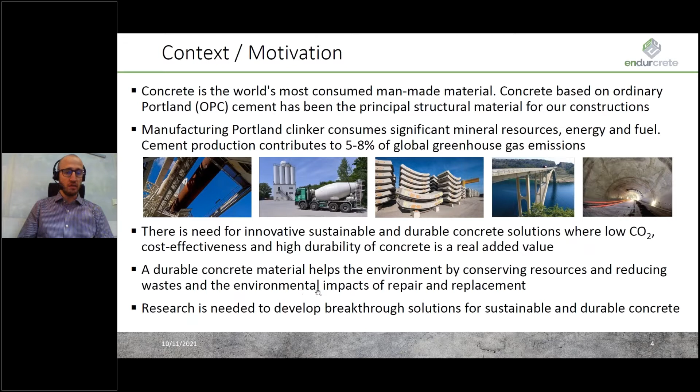So this was the whole idea of the project when we started it. We want to be more sustainable, but also more durable. The reason for the improved durability on top is that, of course, if you're more durable, you will actually postpone the repair or the replacement, which will also decrease the environmental impact of our industry.

We've got funding of 6 million euros from the European Commission for the full task and consortium. Here you can see the EnDurCrete logo with our goal, which is to develop a cost-effective, sustainable concrete with added value application and improved durability.

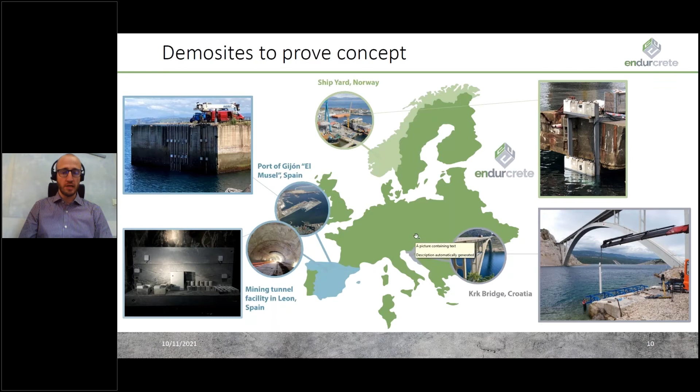And then we have a bridge site in Croatia where we place here - you can see the placement of one concrete panel into this area. The idea is, of course, to validate all what we have developed in the lab into these sites. So you will again hear more from the dedicated partner later on during this webinar.

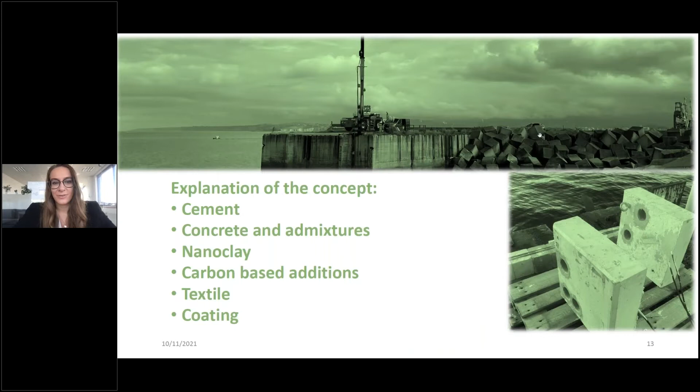Yeah, thank you very much. I would like to present the composite cement activity at Heidelberg Cement. As mentioned before by Arnaud, we have to look at opportunities to reduce the clinker content in Portland cement because clinker production is associated with high CO2 emissions. The new standard EN 197 Part 5 of the European Cement Standard gives us a lot more possibilities compared to EN 197 Part 1 to lower the clinker factor or clinker content in cements.

What is the problem when we lower the clinker content? It's the strength development in the cement. As you can see here on the left side, the 2-day strength of an OPC compared to a mixture where we replaced 30% of the OPC clinker by quartz, which is a non-reactive constituent - because of the dilution of the clinker, we have much lower strength development.

If we take reactive materials described in the cement standard, for example granulated blast furnace slag in a mixture with 10% limestone, we have a very tiny effect on early strength development by these constituents, but on the right side you see the graph for 28 days, and after 28 days we have a significant improvement in strength because of the reactivity of the slag in combination with the clinker and the limestone. But even there is a gap which we have to close.

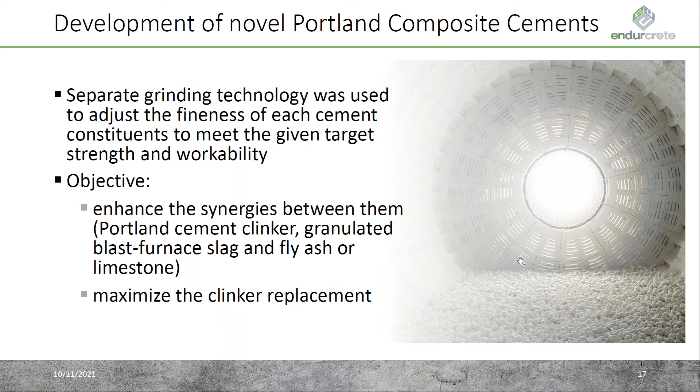And the way to close this gap, what we observed, is the technology of separate grinding of the materials. For the last 100 years, most of the constituents in the cement were co-ground. Now, where we are looking for lower clinker factors, we have to go in the direction of separate grinding, which means we have to grind every material with respect to its grindability and reactivity to the best fineness, to replace at the end most of the clinker.

If you work in such complex systems with 3 different materials in grindability and reactivity, it will take a long time to find the right places where to place your recipe exactly. And there we designed a computer model where we end up at the end with the result that we can replace, if we find the right fineness of the material.

We can replace 50% of the clinker by a mixture of 40% slag and 10% limestone without significant impact on cement performance. At the end, I would like to show you the result when it comes to recipe and to the strength development in our project work here. These are the CEM II/C-M cement and the CEM VI cement, which we delivered to the partners in this project for the activities for all the test and durability aspects tests and for the demo sites, where we will get the presentation now from my colleagues. That's from my side for the moment.

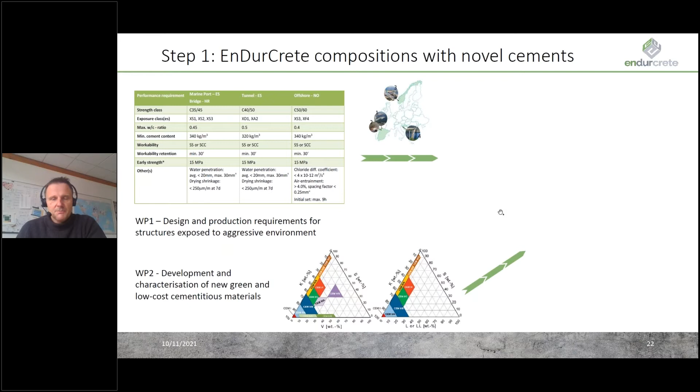The whole development went into 3 basically simple steps. In step number 1, what we tried to do is develop EnDurCrete mixes with novel cements only, which were developed again in work package 2. Our development of concrete recipes was based on design and production requirements, which we got from work package 1. The end result was basically 3 different concrete types containing novel cements.

A marine concrete mix, which was intended to be tested at 2 demo marine sites, one in Spain and the other in Croatia. We have one tunnel mix intended to be tested at the tunnel demo site in Spain. And we have developed one offshore concrete mix to be tested for offshore application at the demo site in Norway.

Then in the second step, we tried to incorporate these novel additions and additives into existing concrete compositions. But before we did that, we tried to figure out what's the impact of these additions on fresh and hardened properties of the concrete. The focus was on workability and strength development, and we tried to incorporate a nanoclay corrosion inhibitor and two types of carbon-based materials, basically char and recycled carbon fibres.

The study on the compatibility of these additives with the concrete was done by Sika, and what they figured out is that these additions have a negative impact on the workability, and this problem was solved by Sika. They provided tailor-made polymers and admixtures to basically solve these concrete performance issues.

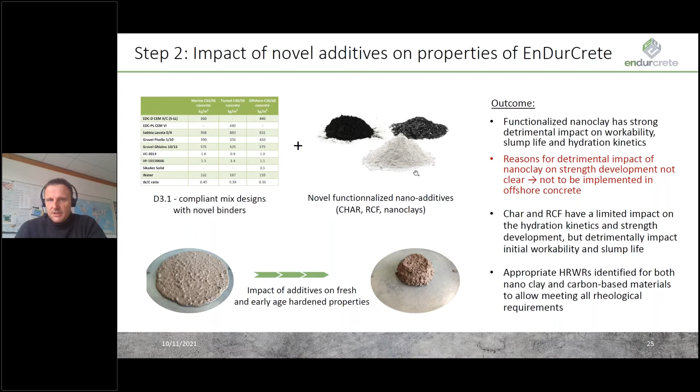When it comes to strength development, we saw that the carbon-based materials have more or less no impact, but this nanoclay corrosion inhibitor has a negative impact on strength development. For this reason, we decided to only test this nanoclay at one demo site. I'll get back to this on one of my next slides.

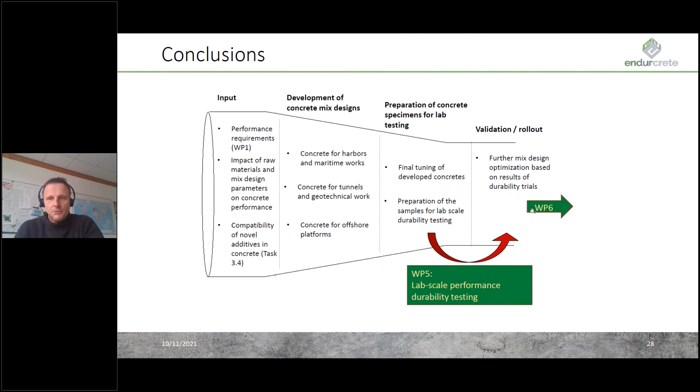This is basically my last slide, just to tell you that in the scope of this work package, we haven't only developed concrete mix designs, but we also helped lab preparation for the lab testing in the scope of work package 5 and rollout of developed solutions, which occurred in work package 6. So this is all I have. Thank you very much for your attention.

Good morning everyone. Today I'm going to explain what we have done so far with the company EnDurCrete and the nano-inhibiting additives for corrosion.

iBox Create is a consulting micro SME located in Valencia, Spain, and we are focused on developing maritime port technologies through two research and development areas: the first one is about advanced materials, and the second one is wave energy. All this activity has granted iBox recognition from the Spanish Ministry of Innovation with the Innovation Seal since 2015.

Our product is a corrosion inhibiting additive, and the knowledge on these nano inhibitors is based on the development of a former company called CS Infraestructuras, which disappeared. Before disappearing, we signed an agreement with them in 2014, where iBox would be in charge of all the technological development and exploitation of the corrosion inhibiting additive. Our inhibitor prevents the occurrence of corrosion processes in structures exposed to marine environments or in areas where de-icing salts are used, and we achieved the Spanish patent, published in May 2019. This is the full background.

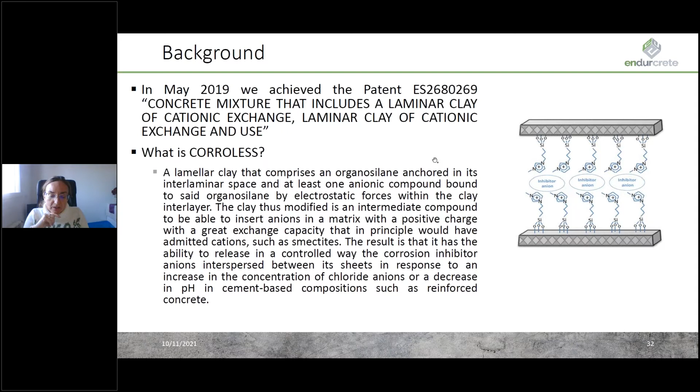Now let's go to the project. Within EnDurCrete, the objective was to develop a product that will act as an intelligent reserve of corrosion inhibitors in reinforced concrete, which can be released only when there is a danger of starting oxidation processes of the reinforcement. The fundamentals of these inhibitors, which we call CORROLESS, is that they are laminar clays modified with silane groups and anionic corrosion inhibitors for the prevention of corrosion in reinforced concrete. These developed additives respond actively to the presence of chloride anions, which cause corrosion in concrete, releasing the inhibitor anion in the presence of high concentrations of these chloride anions through an exchange mechanism.

iBox participated in task 1. During this task, we reviewed the requirements of some regulations specifically for marine environments. Our main task was work package 3, which we were leading, specifically task 3.1 named Development and Optimization of Smart Corrosion Inhibitors based on nanomodified clays. The aim of the task was to develop and optimize the novel additive to be implemented in concrete mix designs, developed specifically to comply with the requirements defined in work package 1.

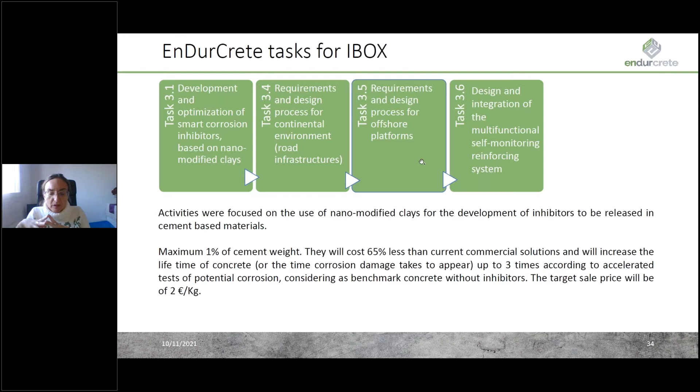For a competitive product, we had to achieve that the inhibitor be a maximum of 1% of cement weight. The price would be less than current commercial solutions, around €2 per kilogram, and the performance would increase the lifetime of the concrete, or the time corrosion damage takes to appear, up to 3 times.

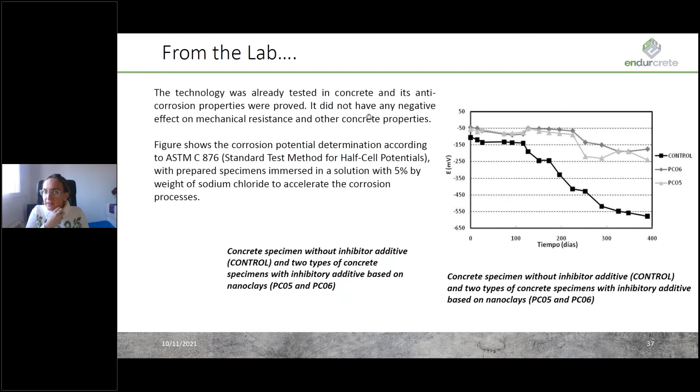During work package 3, the technology was tested in concrete, and it was proved to have anti-corrosion properties without any negative effect on mechanical resistance and other concrete properties at first. Afterwards, it was decided there were some constraints, so it was only going to be tested in marine environment, not offshore. But in our results, as you can see, as time passes, the results are better — it's a specific product which performs better over time.

To sum up, for work package 6, it will be later explained by our colleagues from Acciona. But then in this upscaling...

The inhibitors were ready, and it was time to start with the pilot scale. The first challenge that arose during the upscaling was that the energy consumption during the production process was high, and we have to optimize that.

The results that we are having so far are the same as on work package 3, and Acciona will explain later.

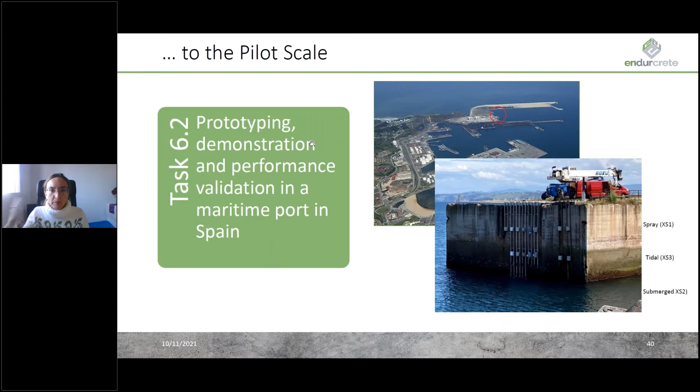So that's also far. We need more time to see the performance of the corrosion inhibitors, but at this moment we have to wait.

The price of the production process was not €2, but it's still in the range of commercial products, so we have to wait for the results. Thanks so much, that's all.

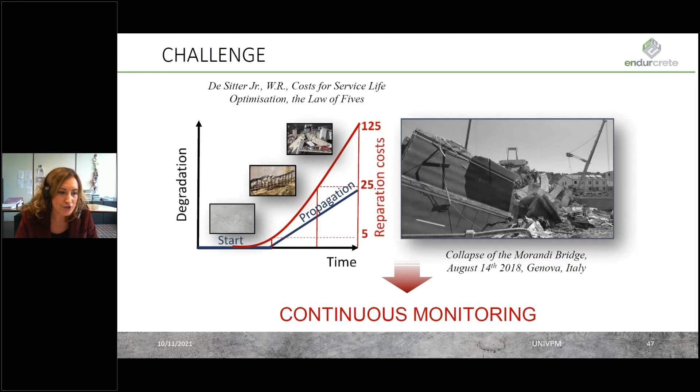Self-sensing is the ability of a material to perceive its own condition simply by measuring its electrical resistivity, such as water penetration, aggressive substance penetration, and strain. So in this context, self-sensing is the ability of a material to perceive its own condition—cracking, water and aggressive substance penetration, and strain—by simply measuring its electrical resistivity.

Compared to other traditional monitoring systems based on a multi-sensor approach, self-sensing concrete is able to detect multiple phenomena in a cheaper and less complex way.

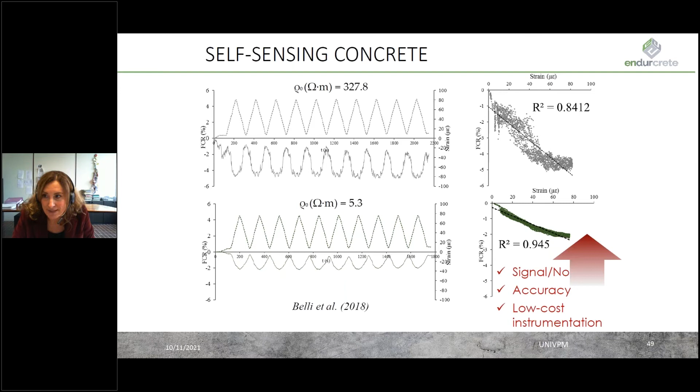The self-sensing concrete properties can be enhanced by decreasing its electrical resistivity with the addition of conductive admixtures. In fact, in this way, by giving a higher signal-to-noise ratio, low-cost instrumentation can be used, with the possibility of creating real measurement networks with nodes distributed on the whole structure.

Carbon-based additions are excellent for self-sensing concrete. However, those actually available on the market, such as carbon black, carbon nanotubes, graphene, and carbon nanofibers, are not sustainable, very expensive, and sometimes very toxic.

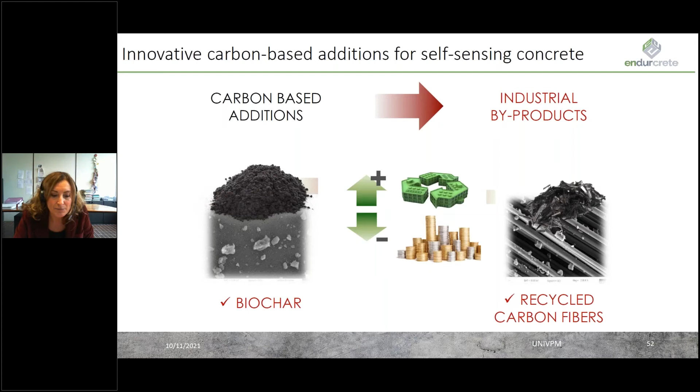Therefore, in the EnDurCrete project, these commercial carbon-based additions for self-sensing concrete have been replaced by innovative, low-cost carbon-based byproducts, such as biochar from thermal treatment of biomasses, and recycled carbon fibers from cutting and milling carbon fiber panels and fabrics.

The experimental results have shown that the joint use of these low-cost fillers and fibers, even if it does not affect significantly the mechanical performances of concretes, does decrease its electrical resistivity, giving the possibility of exploiting the self-sensing performances of concretes in terms of carbonation, chloride penetration, and water absorption.

Therefore, in the EnDurCrete project, a low-cost monitoring system which uses self-sensing concrete blocks manufactured with these low-cost carbon-based byproducts have been manufactured and tested in two different demo sites, Port El Musel in Gijón.

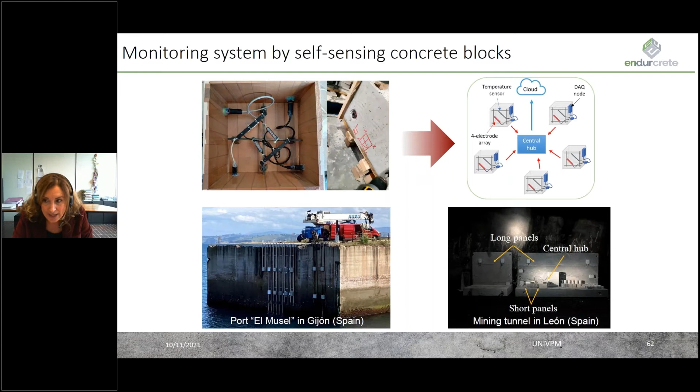A distributed sensor network has been realized, with measurement nodes installed in the elements to be monitored and then connected to a central hub. Data are available on a cloud through a Wi-Fi network or LTE modem.

A mobile application has also been developed, which, after selecting the demo site, the concrete panel, the parameter, and the time interval, shows data as a graph that can be saved in a CSV file to be sent via email.

Results related to the data acquired over approximately 10 months confirm that the signals measured in the panels with conductive additions have a higher signal-to-noise ratio with respect to those measured in panels without additions, confirming the results obtained at lab scale.

The low-cost monitoring system did not show any faults during the demo test activities, and finally, data were not affected by any issues due to the aggressive exposure. Thanks for your attention.

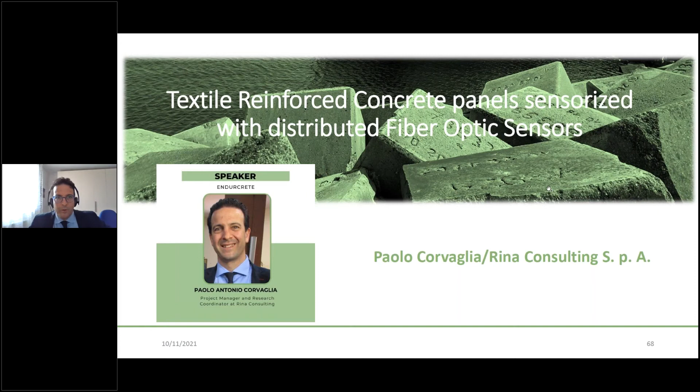Thank you very much, Susanna, for your kind introduction, and good morning to everybody. Textile reinforced concrete is an innovative cement-based composite material exploiting the non-corrosive nature of fiber materials for realizing slender and durable concrete elements.

In the EnDurCrete project, we further innovated this concept by embedding a fiber optic sensor inside these panels, thereby providing them with a built-in structural monitoring capability.

The final goal is to realize a modular sensorized solution like this, so that when you are on the field for installation, you just have to connect the two adjacent panels by means of an external optical patch cord.

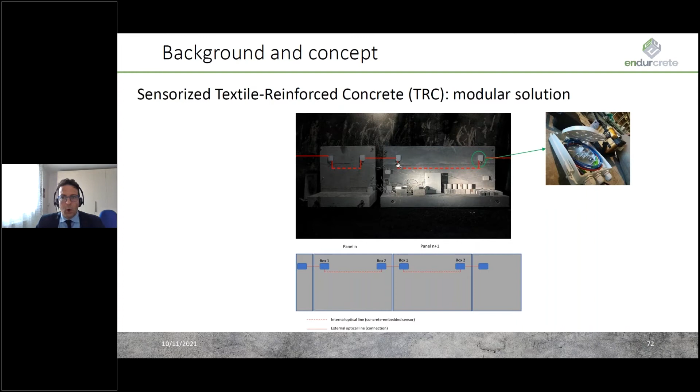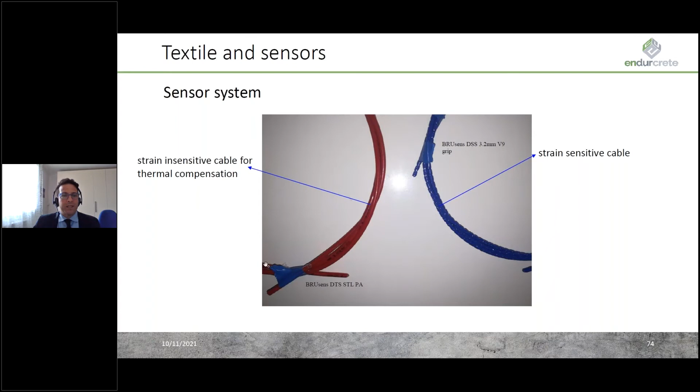Let's have a look at the components of the system. The textile is made of alkali-resistant glass with a mesh opening of 3 centimeters, while the sensor system is made of 2 distinct cables. Here they are. The blue one is a strain-sensitive cable with roughened surface for better adhesion with concrete, while the red one is a strain-insensitive cable for thermal compensation.

In order to set up the production technology and characterize the performances, we designed and produced 2 samples. Sample A is the reference one, made of ordinary reinforced concrete, while sample B is similar to sample A, but with the replacement of the steel net with the textile.

Here are some steps of the production of the samples: textile preparation, then sensor fastening to the net, sensor protection by means of plastic ducts in order to withstand the concrete pressure, the preparation of the mold, then concrete casting, and finally the demolding.

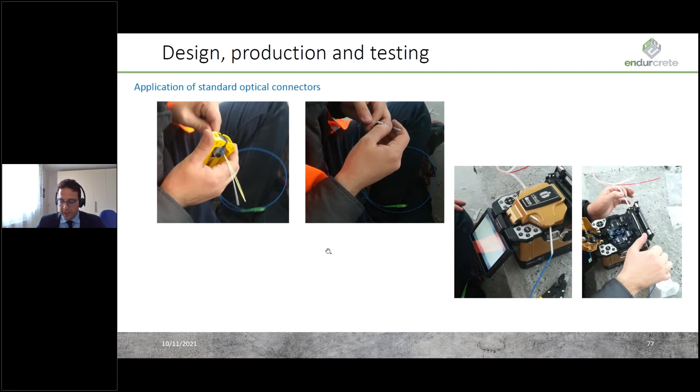These pictures are related to the application of standard optical connectors at the end of the fibers.

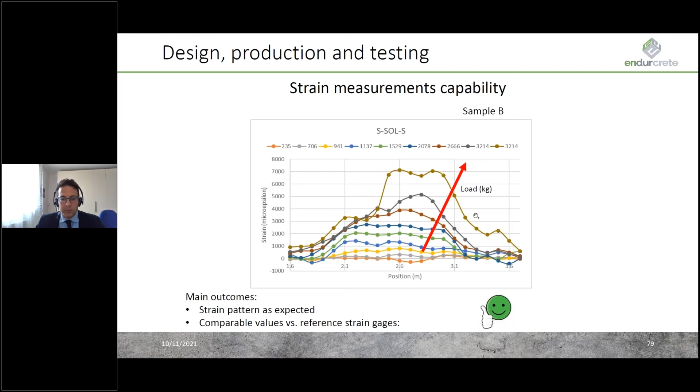The panels were then tested in a 3-point bending test. Here you can see some details of the setup, and here the main results, namely the strain profile along the panel at increasing load. We can comment that the strain pattern shape is as we expected, and also that the strain values we measured are comparable with those obtained by reference electrical strain gauges.

So let's draw some conclusions. We developed and tested textile reinforced concrete panels sensorized with distributed fiber optic sensors, with the final goal of developing a modular concept of self-sensing components. We found that the sensors survived the production process and provided consistent data up to an advanced cracking stage. Also, the TRC solution provided enhanced ductility and load carrying capacity. And finally, we demonstrated this technology with large-scale prototypes in a real tunnel environment.

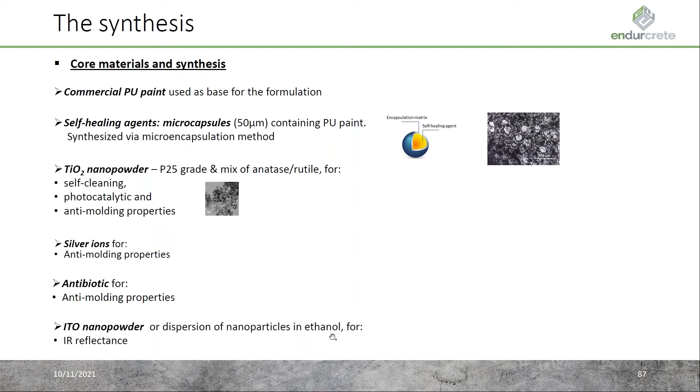The multifunctional formulation includes a commercial polyurethane paint as the base, self-healing agents consisting of 50-micron microcapsules containing polyurethane paint synthesized by AMS via microencapsulation, titanium dioxide nanopowders of Degussa P25 grade as well as a mix of anatase and rutile titanium dioxide for self-cleaning, photocatalytic, and anti-molding properties, silver ions and a small quantity of antibiotic for anti-molding properties, and finally indium tin oxide nanopowder, which serves as a stabilizer of the formulation against the impact of solar radiation on the system.

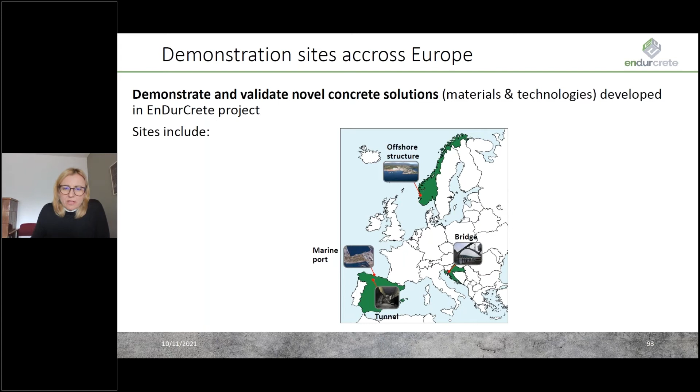We already saw in the first presentation by Arnold that we had 4 demonstration sites across Europe, representing demanding and quite different, environmentally challenging locations and different types of structures. We went from the Mediterranean climate to the ocean climate to the Nordic climate, with structures exposed to the marine environment, as well as a tunnel structure exposed to carbonation and chemical attack.

The purpose of the demonstration projects, as mentioned before, is to test the EnDurCrete technologies, which included different types of cements, different types of additions or admixtures used in concrete production such as corrosion inhibitors, carbon-based green microfillers, textile reinforcement, and multifunctional protective coatings.

At the sites we used different sizes and types of specimens, trying to simulate larger structural elements, while also including a large number of small specimens used for monitoring and determining mechanical and durability properties over time.

At all sites there are different monitoring techniques involved, either through embedded sensors or embedded fiber optics or other monitoring methods, as well as environmental sensors for local climate monitoring, and then non-destructive and destructive testing of the smaller specimens.

The first site I will present is the offshore platform in Norway, which was led by Kværner, now Aker Solutions, and the contributing partners were ZAG, Acciona, RINA, AM Solutions, and Nuova Tesi System.

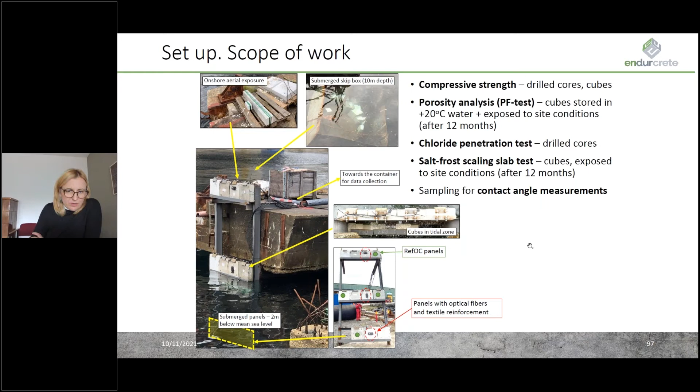You can here see some of the results - the detailed results are presented in one of our last deliverables. The panels were used for drilling cores, and as you can see on the core here, chloride penetration tests were performed on both sides, and the middle core was used for concrete compressive strength determination.

Generally, we can see that the reference concrete had higher values than the EnDurCrete offshore concrete, probably due to unfair competition with the 52.5 cement. Nevertheless, the EnDurCrete offshore concrete performed quite well regarding frost and permeability measurements, and the coatings performed really well.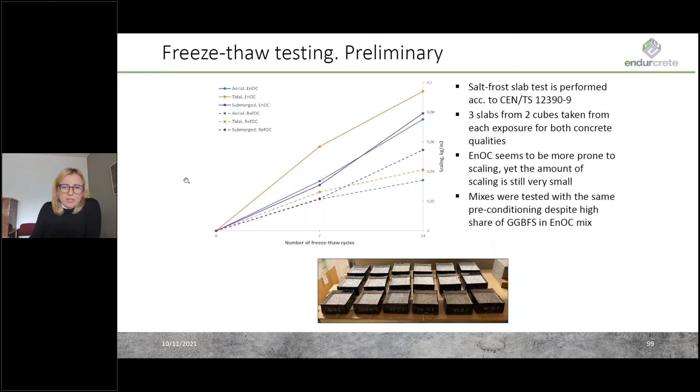The freezing-thawing testing results are presented in this graph. As you can see, the reference offshore concrete performed a little bit better, but overall all concrete samples performed very well regarding the frost degradation problem.

Generally, the EnDurCrete offshore concrete had lower permeability than the reference concrete, and the total air content was varying between 5 and 6%, which is a very good prerequisite to be frost resistant.

Chloride penetration tests showed no apparent difference in chloride penetration between the offshore reference and offshore EnDurCrete concrete after 12 months. The highest chloride content was measured in the splash zone and the submerged zone. The treated panels also show minor presence of chlorides up to 5 mm depth.

The measurements using electrical resistivity sensors, performed by ZAG, did not show any significant corrosion activities. Contact angle measurements of the waterproofing membrane, performed by Acciona, showed low wettability of the surface, implying that its hydrophobic properties are as expected.

The second demonstration site is a marine port in Spain, which was led by Acciona, and contributing partners are Novatesi Systems, AM Solutions, iBox, Vito, Heidelberg Cement, and Sika.

The location of the demonstration site is in North Spain, exposed to ocean climate. The prototypes of the samples were installed in a concrete dock called Port Gijón, El Musel, Spain, supported by the Port Authority and coordinated by Acciona.

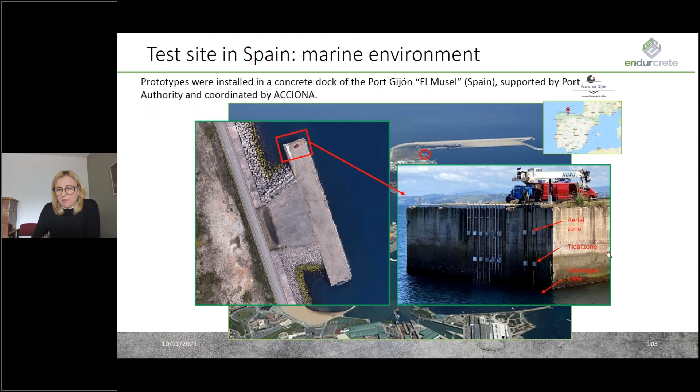We can see on this slide how the steel frame was used for holding the panels in different zones, from aerial zone, tidal zone to the submerged zone.

In this site, two cement types were used. First, the reference cement was CEM3A 42.5N, and the EnDurCrete cement CEM2CMSLL. Additionally, technologies developed in EnDurCrete were used: polyurethane coating, corrosion inhibitors, and biochar with recycled carbon fibers.

You can see all the tests which were performed on those samples exposed to those environments, which included durability tests, carbonation, chloride and sulfates determination, compressive strength, and monitoring with electrical resistivity sensors.

On this slide, we can see different samples from different zones, which are quite significantly different. In the splash zone we have a clean concrete surface. In the tidal zone we have some algae formation, and in the submerged zone we have some biological growth. Overall, the samples performed very well.

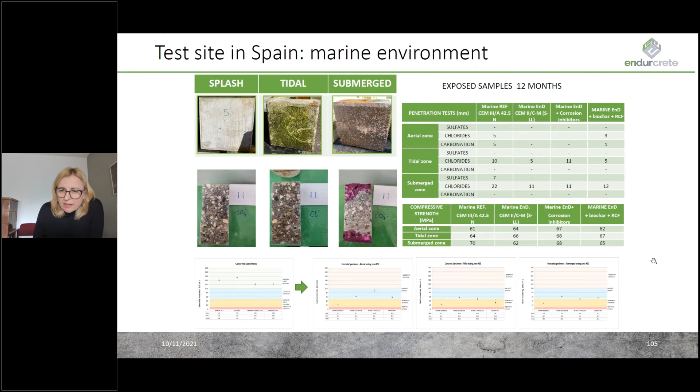As we can see in the compressive strength results, the EnDurCrete cement or concrete samples achieved the same or even higher compressive strength compared to the reference one. Also in penetration of chlorides and sulfates, the EnDurCrete concrete samples performed better than the reference concrete. The detailed results of the electrical resistivity were presented before by Margarita and Francesca, so I will not go into details.

Additionally, we can see the results of porosity, density, and mean pore size. Most important is that both concretes performed really well. Also, water penetration was much lower compared to the reference concrete. In the SEM scans, we can see no significant difference in the microstructure, and the overall impression is that EnDurCrete concrete had very low permeability.

In summary, sulfate penetration was not recorded in splash and tidal zones, and in the submerged zone, the best results were with EnDurCrete concrete with CEM2 CM SLL. The same was true for chloride penetration, with better results recorded with the EnDurCrete concrete in all zones, as well as for carbonation. The bulk resistivity showed a moderate risk of corrosion for the reference cement and low risk of corrosion for the EnDurCrete concrete. In the SEM scans, there were no significant differences.

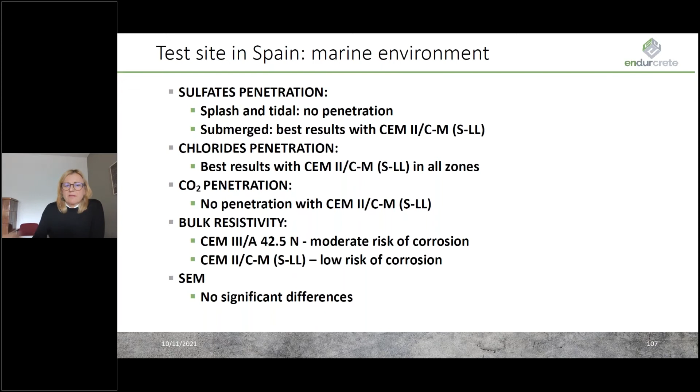The next demo site is also in Spain, again led by Acciona and supported by Novatesi Systems, AM Solutions, iBox, Vito, Heidelberg Cement, and Sika partners. The tunnel is a publicly owned entity that used to be a coal mine, but is now out of service and used as a research center for investigation of different excavation techniques, spraying, shotcrete, etc. We used it for placing our tunnel elements, as Paolo has already presented, representing the exposure classes XD1 for moderate humidity and XA2 for moderate aggressive chemical environment.

In the tunnel, two tunnel elements were placed - large size panels - and there are 60 small specimens for different test purposes, also including different technologies. As presented before, inhibitors, carbon, and coatings were used here.

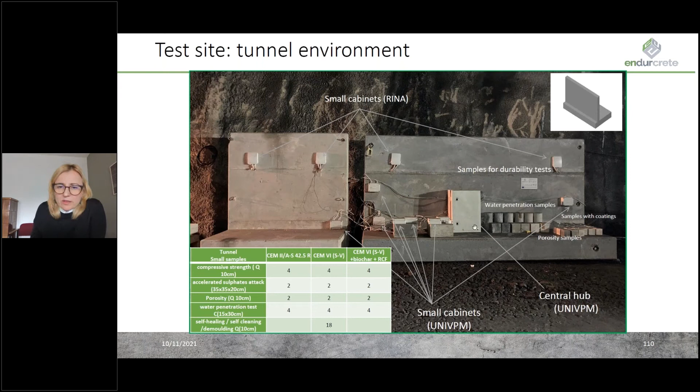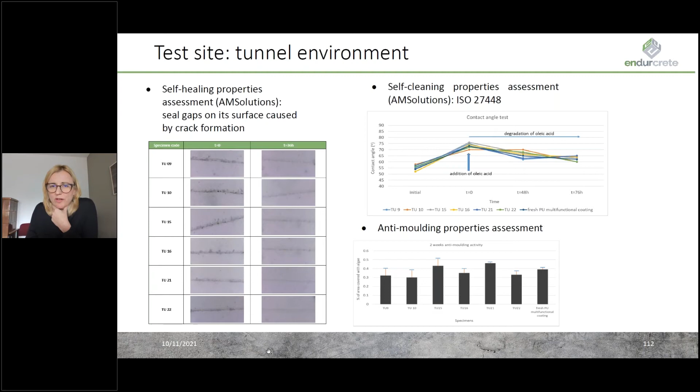In this slide, we can see the testing of the coating, which was presented by Maria, so I will not go into details. What's important to say is that the coating showed very good performance in self-healing, self-cleaning, and anti-molding properties.

Finally, for the durability tests, we can see very high compressive strength from the EnDurCrete concretes, which were produced with the CEM6 SV, compared with the reference concrete produced with CEM2 AS 42.5R. The porosity measurements showed very similar results with a high number of pores, but the mean pore size around 0.04, 0.02 micrometers, which means very high resistance to frost.

Also, water penetration was much better, or no penetration at all, recorded with the tunnel EnDurCrete concretes, including the addition of biochar, compared to the tunnel reference concrete. No sulfate penetration was found in any of the mixes, and the SEM scans showed no significant differences at the microstructure level.

The last demo site was the Krk Bridge in Croatia, located at the northern part of the Adriatic coast, led by Infraplan and ZAG, with contributors Heidelberg Cement, AM Solutions, SEA, and NTNU. You can see the location of the panels under the Krk Bridge, connecting the mainland and Krk Island. It has two arches, and we are located at the platform used for production of the elements at the initial construction site.

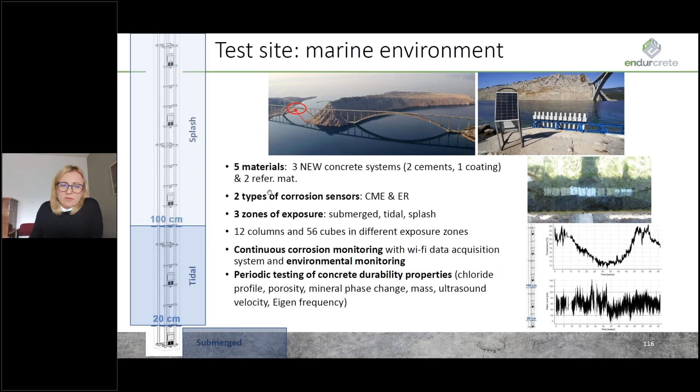Here you can see the production of the columns at ZAG. In each column, there are embedded 5 ER sensors along the length of the column, and 16 coupled multi-electrode sensors, not in all the columns, which are used for measuring the corrosion currents between exposure zones over time. In each column there are 4 reinforcement bars, which will be used once we decide to, or once significant corrosion activity is recorded, for demolishing and doing detailed visual examination of the rebars.

You can see some results of the chloride penetration tests. Very briefly, the chloride surface content is highest at the splash zones, as you can see in both the EnDurCrete concrete and the reference marine concrete used with the reference cement. Generally, we see very low diffusion coefficients and very similar behavior for both EnDurCrete and the reference concrete.

These are the SEM scans, which will be explained by Clark here from NTNU. The scans are actually confirming our chloride profile test.

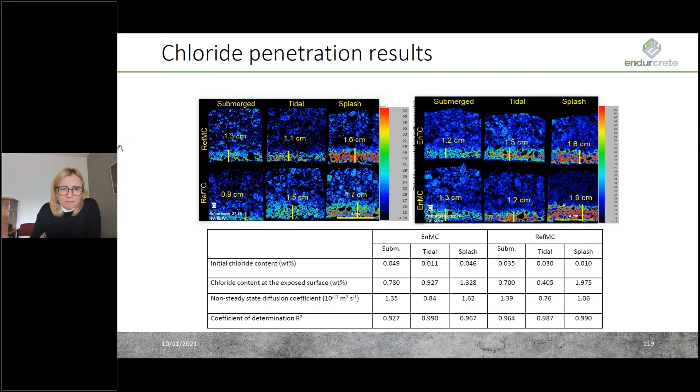So what we can conclude: there is no significant corrosion activity to make a final conclusion about different materials and exposure zones, only different current fluctuations among different columns, and no evidence of stable anodic and cathodic currents. There are very minor differences in durability properties, and we can conclude that the new cements are comparable to reference cements, which were CEM2 AS 42.5R and CEM3 42.5N.

For all our demonstration sites, as you can imagine, we have results after 12 months and after 18 months for Krk bridge. They are not sufficient to make final conclusions, so all our demonstration sites continue measuring and performing monitoring results after the end of the EnDurCrete project.

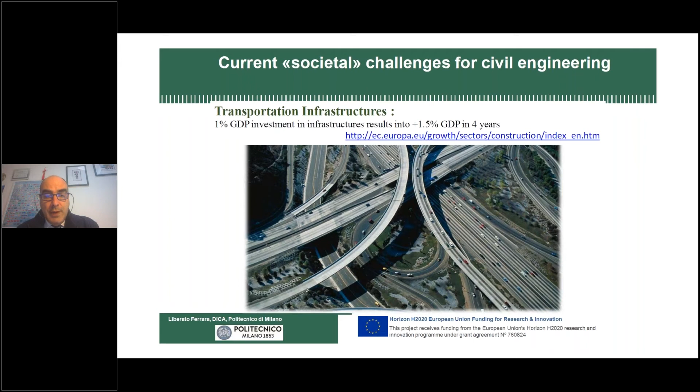Actually, we have to focus on how to build sustainable, long-lasting infrastructures, considering the positive outcomes they can generate on the economic growth of our communities and societies, but also considering the need of refurbishing existing infrastructures, because traffic interruptions and delays that we have likely experienced several times during the past years cost every household $3,600 USD of just money outgoing.

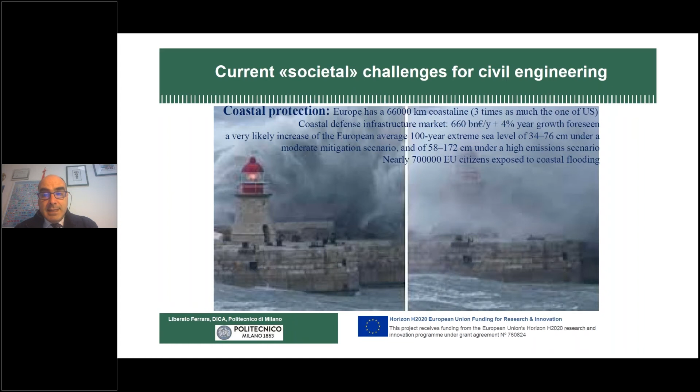And then we have to look into coastal protection, which can be challenged by climate change events. These are events in Malta Island, pictures taken from a Malta newspaper. In a Mediterranean climate, you can have these extreme events which challenge our structures. Consider that Europe has 66,000 kilometers of coastline, and about 700,000 European Union citizens live in areas exposed to coastal flooding, and this is becoming even worse considering the sea rise due to climate change.

Decarbonization goals - we have to improve and make more efficient and economically viable the use of renewable energy sources. These are two specific sectors that we have tackled in our ReSHEALience project. One is geothermal energy; we have several areas in Europe producing this kind of energy. There are remarkable examples - last week I was reading at the German pavilion in Expo 2020 in Dubai that the city of Munich is completely autonomous in this sense, because it runs completely on geothermal energy.

And we also have to go farther with offshore wind energy harvesting, which is also a sector we've tackled in our project, together with blue growth. We live on a planet called Earth, but actually 70% of it is made of water, of sea, and only 5% of our economy and of our food comes from the sea. So there is the need to really take much more from the sea and leave the earth to rest a little bit, because it's now depleted.

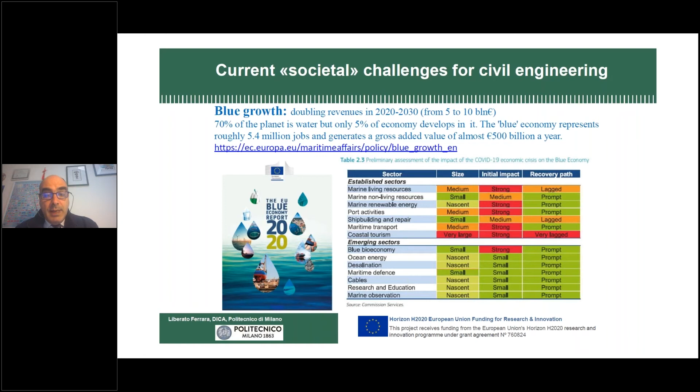And in the blue economy sector, there are emerging sectors that can really also drive the recovery of the economy and of the society after the pandemic. But whenever we go in environments like the ones I've mentioned, and we go to the sea...

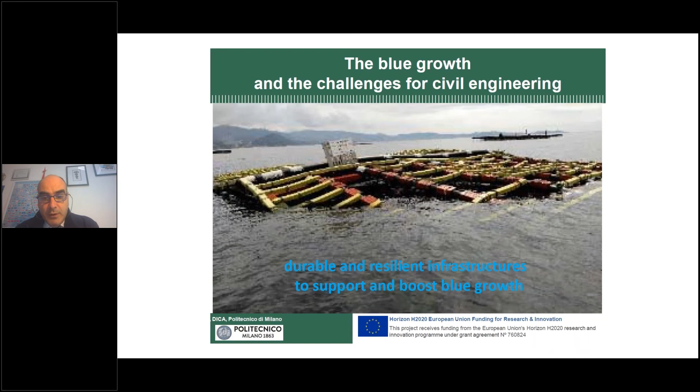We go to aggressive environments like the one in geothermal drilling, we need durable and resilient infrastructures. These are pictures which are iconic by themselves and can show what can happen with structures in offshore or sea environments. They can undergo severe deterioration problems. With accidental extreme events, they can be completely destroyed with economic losses, considering also that you lose the structure, that you lose what the structure was built for. This is a platform for mussel farming, so you lose the platform and the harvesting, and it's quite a huge loss for the companies.

And this is an example of what we demand of our infrastructures in geothermal energy plants. This is a cooling tower structure. You see this water is rich in sulfates, rich in chlorides, and there is abrasion due to the rain. This is the service condition for 364 days per year - the structure rests only 1 day per year for maintenance. And this can be the consequences due to corrosion of the concrete, of the matrix, due to the sulfates.

So this was the scenario, and when we go to the design codes, we actually find only prescriptions based on minimum cement content, maximum water cement ratio, and so on. But these prescriptions, if we go to modern concrete, high performance concrete, or even ultra high performance concrete, are automatically guaranteed. So we do not really have a performance-based durability design framework which can help us also in promoting innovation in this sector.

So this was the context in which we, as the ReSHEALience Consortium, gathered and applied. The project started on January 1st, 2018, and we are going to finish in a few months from now, at the end of March. We have 13 partners and 3 linked third parties from 7 European countries. These are the partners of our consortium - we cover the whole value chain of the concrete construction industry, from producers of constituents to engineering consultancy companies, to precast construction, large-scale infrastructure companies, and large-scale end users. We have 6 universities in the consortium, and I am the coordinator, with Politecnico di Milano.

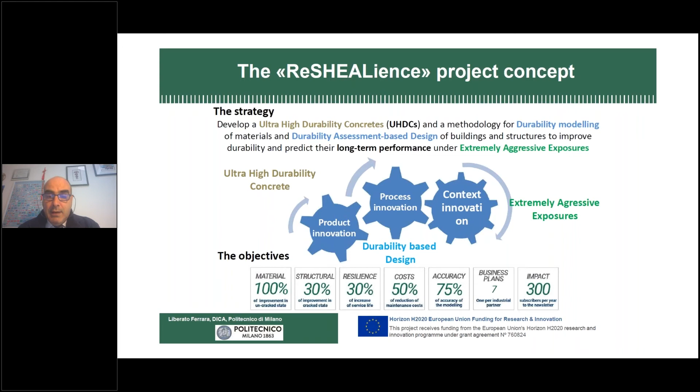So as I said, our goal is to work on the product process context. We have developed the concept - it's not a branded material or a specific material, but a mix design concept, a material concept. We call it ultra high durability concrete, and the methodology for durability-based design in order to tackle our problem of designing longer lasting structures in extremely aggressive exposures. Sorry, there was a movie here which was made in our lab.

We started with technology of ultra high performance fiber reinforced concrete, and we engineered its composition using micro and nanoscale constituents to promote self-healing and self-curing, giving us extreme control of crack width, controlling cracks in the range of a few tens of microns. We used alumina nanofibers, cellulose nanomaterials, and crystalline admixtures for self-healing.

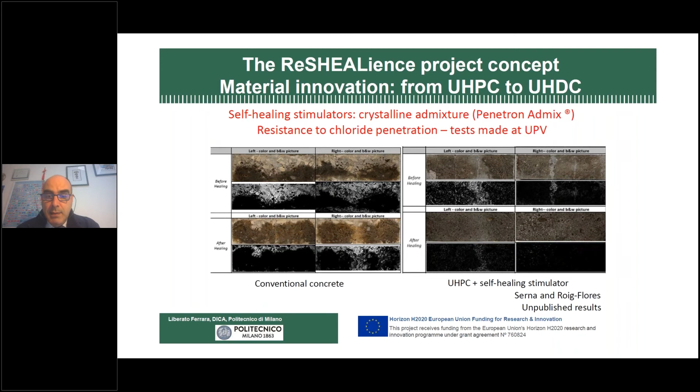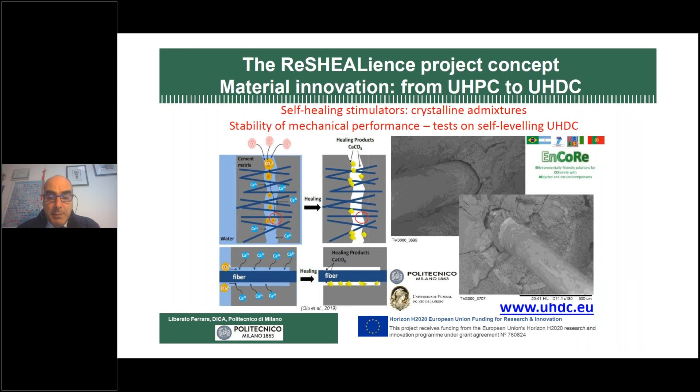We also checked, because we wanted to explicitly exploit this in the design, what self-healing means in terms of the material's ability to maintain mechanical properties over a long time, with repeated cycles of cracking and healing, which is what the structure will experience. We also conducted microscopic investigation to check the efficiency of the healing on the fiber-matrix bond, as you can see from these graphs.

So what we did with the materials we developed—it's not a unique material, each was designed with specific reference to the pilot and the conditions it had to experience. We built, and are currently monitoring, 6 full-scale pilots: 2 in Italy at a geothermal site, 2 in Spain, 1 in Ireland, and 1 in Malta.

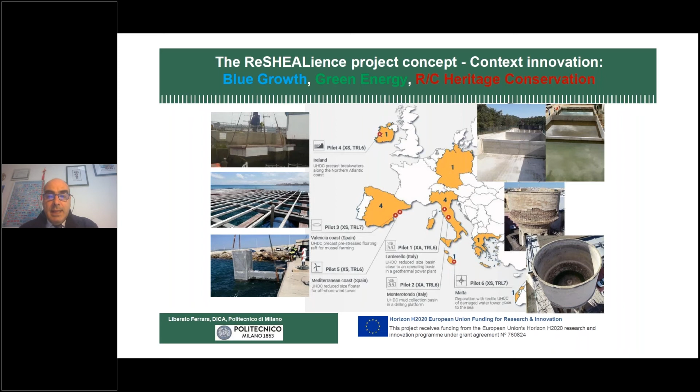We tackled the sectors I mentioned before. This is the pilot in the Valencia harbor, a floating raft for mussel farming. We have a camera streaming live 24 hours so we can inspect the prototype at any time, and periodically we go to inspect the cracks and healing. Some of the beams in this prototype were pre-cracked, with different levels of pre-stressing to check the material's efficiency under different conditions. This is an image of when the pilot was floated in May 2020.

This is the second pilot, a floater at 1-to-2 scale for an offshore wind tower, anchored to a quay in the harbor of Sagunto, Spain. Rover Maritime is responsible for this together with the University of Valencia, whereas for the other prototype the company RDC was responsible. We visited it.

You can access the pilot via a bridge made with the same material, and go inside to inspect it, with different sensors installed to check healing and the corrosion of the ordinary reinforcement. We visited it during an international conference, with several people going up to this ultra high durability concrete bridge that we built.

This is the Irish pilot, made of 3 different cells. The first and biggest, in the forefront of the picture, uses regular concrete technology, whereas our material in this case is an ultra high durability matrix with textile reinforcement—compared to the previous pilot, which used dispersed fiber reinforcement. You can see the saving of material this allows, though obviously you cannot go too thin because of buoyancy requirements.

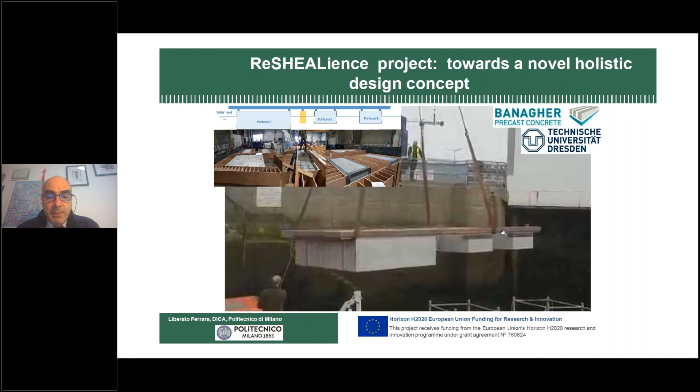The pilot is now in Galway harbor. These are some of us visiting it. You can see where the mouse is indicating a box where all the sensors connect with their cables, wirelessly transmitting to a control unit located in the offices at the harbor.

And some images of the Malta pilot. This was an existing structure, a water tower, which was severely damaged, as you can see, and we retrofitted it using both ultra-high durability concrete with dispersed fiber reinforcement, and for the drum, textile reinforcement. Here are some images of the finished structures.

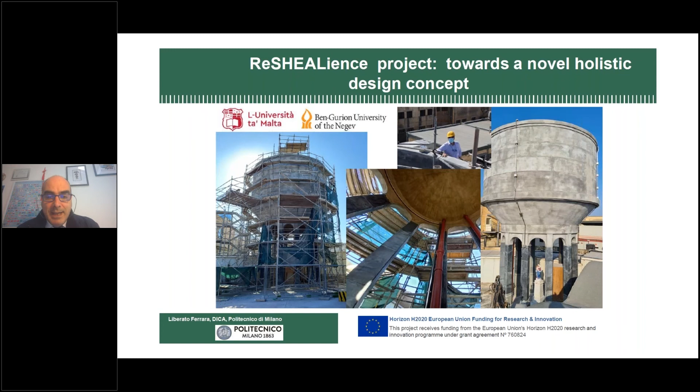We were able to go inside before filling it back once again. These are some images of the load test made to filling, and now the structure is in use in the Valletta Harbor area. And some images of the Italian pilot.

We built them on the site with a dedicated batching plant, which was brought on site. This is a basin for the mud in service of the geothermal drilling platform. And in this other case, this is a pilot meant to keep the water from the cooling towers.

We designed this basin with 3 different technologies. We have ordinary reinforced concrete, 10 centimeter thickness. We have cast in place ultra high durability concrete, 6 centimeters thickness, and we employed a partially precast solution.

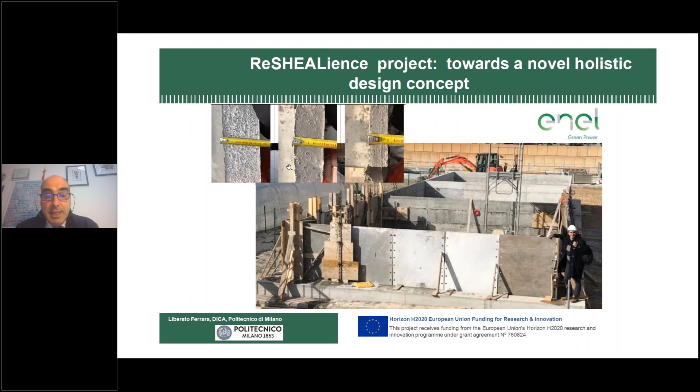You can see this during the construction. This was February 2020. The slabs were precast with holes and the cast in place columns in between them. The material also filled the holes and realized the connection. But in this case, the slabs were only 3 centimeters thick, so we have a 70% saving on the material.

These are some images of the finished basin and of load tests that we have been regularly performing and monitoring. You can see here the basin is completely filled, and you have some pictures here on the right. It's a little blurred, but it shows the degradation of our ordinary concrete as exposed to the sulfate water, and our UHDC material, which is very smooth and completely sound.

And some pictures also you can see here, an image of a quite large crack, a shrinkage crack, which was completely healed with no detriment to the water containment capacity.

Well, actually, if you go to the mix design, people may complain that we are using a lot of cement and this may not be good for sustainability. But actually, this is not a correct way, in our opinion, to look at it. You have not to look at the composition per cubic meter, the carbon footprint per cubic meter.

Actually, if you consider an ordinary concrete with 350, 400 kilos per cubic meter of cement, to realize 1 meter of the wall of the basin, which is 10 centimeters thick, you need 40 kilos of cement. But in our case, with this mix design, to realize 1 meter of the basin wall, which is just 3 centimeters thick, you need 18 kilos of cement. So in the end, you have more than 50% saving on the use of material.

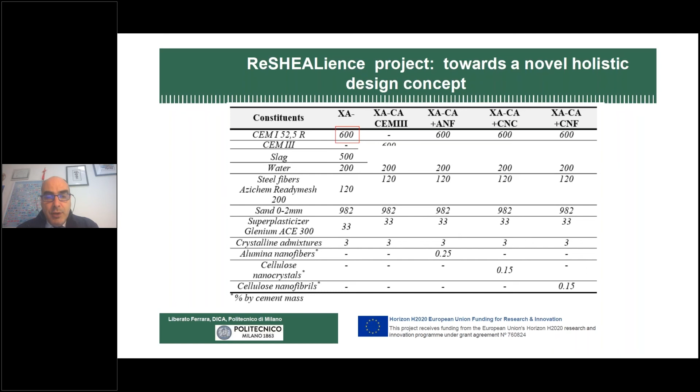So think of the structural unit, think of the functional unit, and not of the cubic meter of concrete. And most of all, let us start thinking in terms of life cycles. We may have a higher construction cost, but in the end, with reduced maintenance, the life cycle cost can be greatly improved.

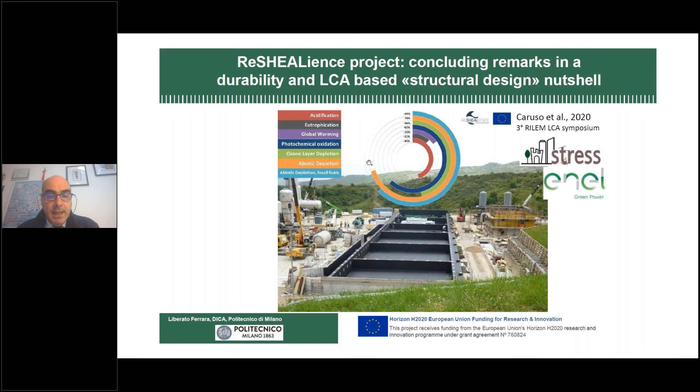And these were demonstrated for our structure with significant savings on the life cycle indicators. So in the end, we embed the degradation models into the structural design, being able to arrive at the prediction of the end of life. Obviously, with this material, the end of life is quite long, more than 100 years. So you may ask, what does that mean?

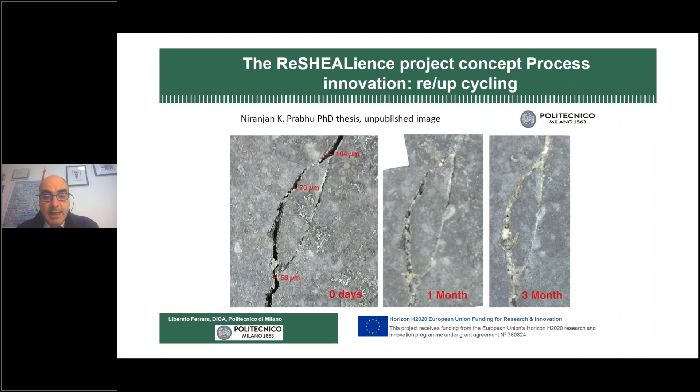These are results of a PhD thesis going on now. We're also able to guarantee the persistence of the healing capacity upon recycling.

So which is the final scenario? This is a reflection paper addressed by the European community on the role of materials in the post-COVID society. And this is the vision that we take for our project for its exploitation after its end: to be able, through advanced materials, to create a less dependent and more resilient economy, guaranteeing raw material supply, higher material durability, higher energy efficiency, and a higher degree of material recycling.

This is the welcome page of our website, where you can find all the information about the project. We have also developed a book with the contents of our activity. There is a page for dissemination, where you can find all our open access journal papers published so far. We published 13 papers as a consortium, and for most of them we also have open data.

So you have all the data sets freely available according to the open data policy.

As an educator, as a university professor, I am quite proud and happy to say that we offered about 20 young engineers and young scientists starting career opportunities with PhD positions and researcher or assistant professor positions in university. And we trained, only in Milano, more than 40 students with their master thesis on this topic, because I think that this is also the way to have this material widespread in the market, training future engineers to confidently use these materials.

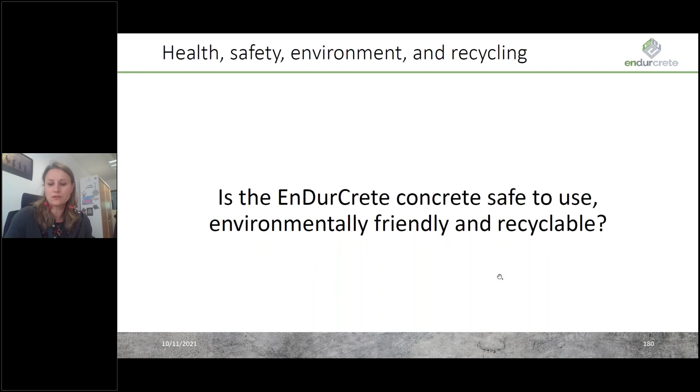So today I will speak about the health and safety aspects, and also the environmental impact and the recycling aspect of new materials. It's an important issue to take into account when we create and use new materials. So we have to have a global vision of the whole life cycle of the product, to address these three main topics: health and safety, environmental impact, and the recycling aspect. For that, we have to analyze each step separately and see their role and impact.

So for example, for the health and safety aspect, we have focused the analysis on the production step. In the EnDurCrete concrete, new materials are involved, such as nanomaterials. So it's important to update the risk assessments regarding the use of these new materials. I've also looked at the regulations regarding the use of this product. This way, we are able to update the risk assessment, adjust the protocols, propose means of prevention for worker exposure, adapt the training of the workers, and propose guidance to ensure that the product can be handled safely.

So the second pillar that we analyzed is the environmental compatibility of the product. For that, we focused on the two last steps of the life cycle of the product: the use and the recycling scenarios. It's important that the product is compliant with environmental law and avoids any leaching of organic pollutants or heavy metals from the material into the environment.

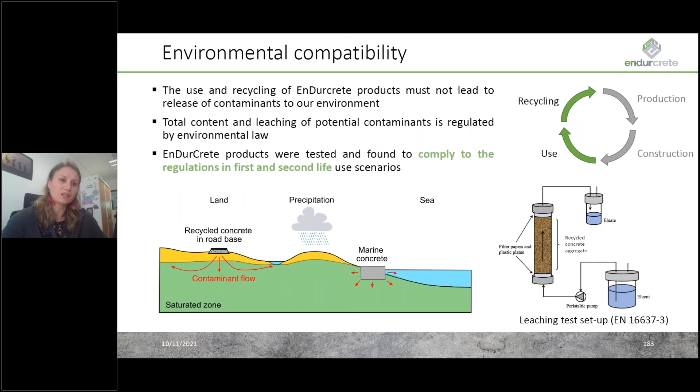So it's important to know that after the service life, concrete structures are usually demolished and crushed into pieces, and then the rubble can be reused as aggregate in a road base, for example, or in new concrete. So for that, we have to check that the EnDurCrete concrete is also suitable for these recycling practices.

So we have checked that the EnDurCrete concrete can be recycled by conventional recycling facilities, and this is okay. We have also confirmed that the technical characteristics of the EnDurCrete recycled concrete aggregate are equivalent to the reference material, and this is also the case. So in the end, we have seen that the EnDurCrete concrete can be considered safe to use, environmentally friendly, and also recyclable.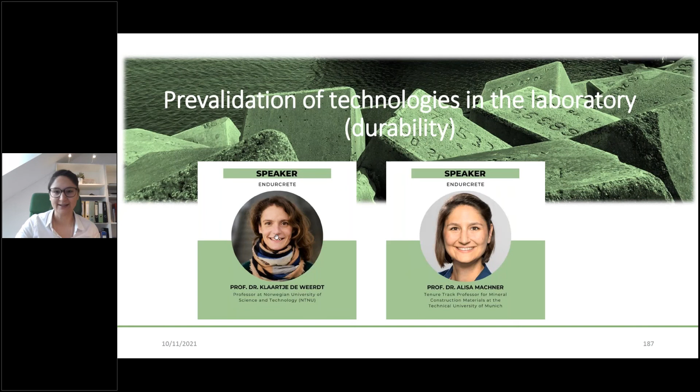First, I'm going to talk about the carbonation part of the durability investigations in the EnDurCrete project. Within the project, CEA developed a carbonation model amongst others, and ZAG and NTNU were asked to provide experimental data to calibrate and verify this model.

In the beginning of the project, these three project partners sat together discussing what we should take into account, what parameters the model needs, and how we can obtain these parameters from laboratory tests in the best possible way. There were a lot of discussions on various parameters and how to test them.

And now we can start the poll, because we were thinking, okay, if you had to choose one parameter, which of them would you take for sure into account? We have answers from A to E, and we could start the poll now.

So from a lot of different parameters you can choose, if you have to choose one, which one would it be? Relative humidity, drying rate, cement composition, CO2 concentration, or the water to cement ratio? We have about half a minute for this poll, so just take the one that sounds most important to you as a first idea.

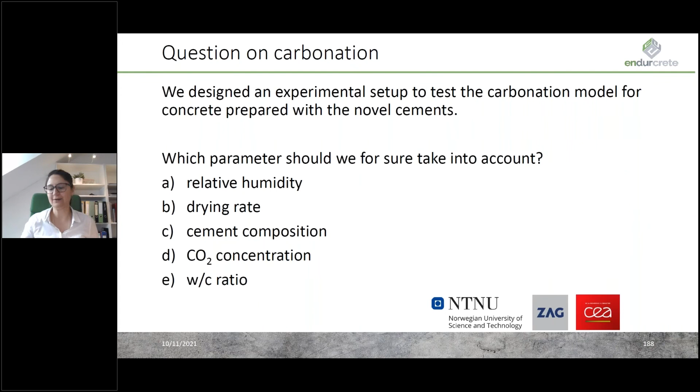We can proceed with the presentation, because instead of just giving you one answer - spoiler alarm, there is not one answer to that question - I would rather show you how we approached that when we were sitting together in the beginning of the project discussing it.

So what we did is get mortar and concrete prisms. They were prepared by Acciona and then sent to the NTNU and ZAG laboratories. Half of these prisms we cut into thick blocks. Of the prisms, we know the cement composition - we have a cement producer on board in this project - but also the mortar and concrete recipe or mix design: aggregate types, particle size distributions, the water to cement ratio, the admixture content, all of that was known.

So half of these prisms we cut into thick blocks and carbonated them, at 60% relative humidity and 1% CO2 concentration, for various times. At these various carbonation times, we took blocks out of the carbonation chamber, split them, and on one part determined the carbonation depth, as most of you know, with a pH indicator - spraying the surface and reading the carbonation depth, either manually or with image analysis.

On the other part, we profile-ground inwards, so we got powders from various steps towards the inner of the sample, and these powders were analyzed with TGA, so we got an idea about the portlandite content and the calcite content at these various steps. From this, we got a pretty good idea of the carbonation development over time, since we did that at various carbonation times.

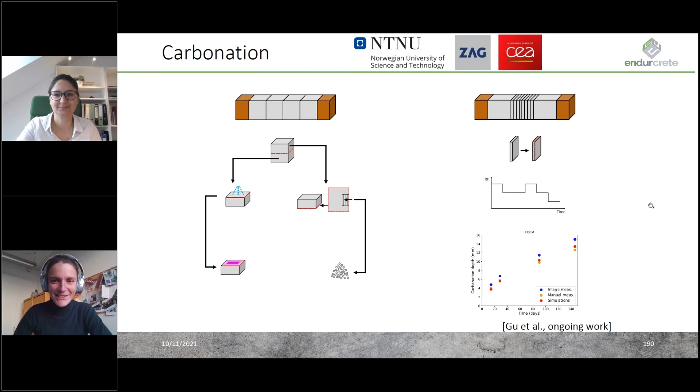Thank you, Alisa. Besides carbonation, we also looked into the chloride ingress in concrete, and the concretes developed in EnDurCrete. As most of you know, chlorides originate either from seawater or icing salts, and they can ingress into the concrete cover. When they reach a sufficiently high concentration near the reinforcement, they can cause corrosion. This reinforcement corrosion is considered one of the main degradation mechanisms for reinforced concrete exposed to seawater or icing salts.

If our EnDurCrete concrete is supposed to be durable, it has to have good resistivity against chloride ingress. So I have a couple of slides where I'll take some examples, and we're going to look into the concretes exposed at the Krk exposure site, which Irina already introduced to us.

We scanned these with a micro-XRF after they had been exposed for 1 year. This exposure site, like some of the others used in this project, has the advantage that we can test different exposure zones.

Another little poll to check whether you're following and you're all awake. Irina already gave a little hint at the correct answer to this question: which exposure zone do you think is most susceptible to chloride ingress? Is it the submerged zone, the tidal zone, or the splash zone? Could you launch the next poll?

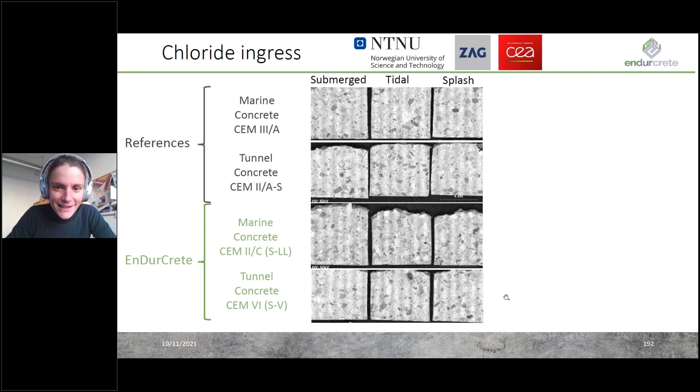If we go to the next slide, we can see our chloride maps. All these samples have been exposed from the bottom to chloride, so chlorides have ingressed from the bottom part of these samples inwards. To make the ingress depth clearer, I've added white bars that give an indication of how deep the chlorides have penetrated into the concrete, and of which depth they represent.

Looking at the answer to our question, comparing the columns - submerged, tidal, and splash - we can see that the samples exposed to the splash zone tend to have the highest ingress. So the splash zone seems to be the worst, at least at the Krk exposure site.

If we compare the different concretes - the reference concretes in the top 2 rows versus the EnDurCrete concretes - there are actually no large differences. That's also what Irina presented when she showed the results from the exposure site. Our EnDurCrete concretes, which are more environmentally friendly, perform similarly to the references. So that's a very good thing - they're more environmentally friendly, but still as resistant as the references to chloride ingress.

So this is a sneak peek of results. As Irina also said, these are results after 1 year, and we're very interested to follow this up together with Infraplan and ZAG at this exposure site, to see how this chloride ingress develops over time. We will also compare that to laboratory experiments we've done in parallel on these concretes.

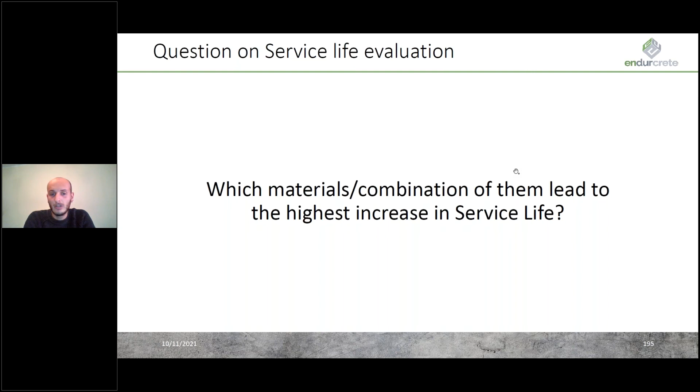In the first case, we analyzed chloride diffusion, and for that we analyzed two different kinds of structures: a reinforced concrete pier and a reinforced concrete dissipation box, both in a marine environment. We analyzed the critical pile element for the first structure and the critical external wall for the second one in order to evaluate the service life of this structure.

We can go up to 25% using also the coating, and using the nanoclay inhibitors we can have a huge increase, up to 42% increase of service life on average.

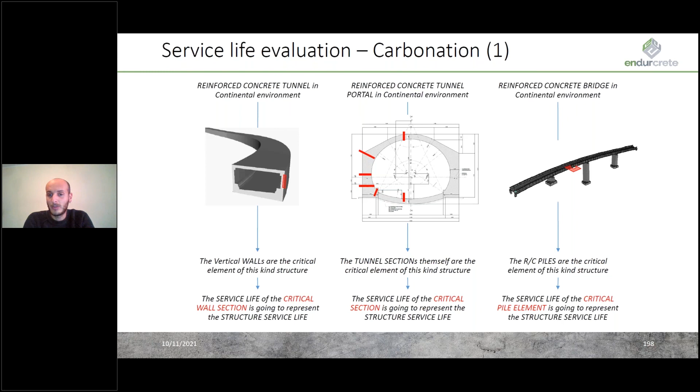The second phenomena analyzed is the carbonation. This phenomena is assessed in 3 different structures: the first two are different concrete tunnels in a continental environment, and the third one is a reinforced concrete bridge in a continental environment. For the first two structures we check the critical section in the lining of the tunnel, while for the third one we check the critical pile element among the 3 different piles in the structure.

For the carbonation, we can see a huge increase in service life can be reached by using the EnDurCrete cement instead of the reference one, and on average we can reach a 45% increase in service life.

So we can see that the use of EnDurCrete and also the implementation of nanoclay inhibitors can lead to a very high increase in service life. The second question we will look at is which parameter has the highest influence on the service life evaluation.

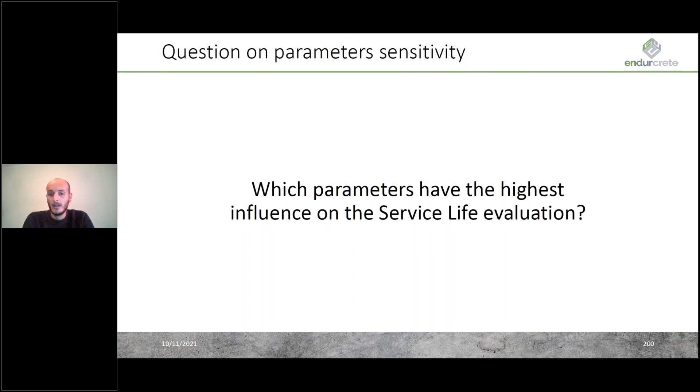The three most important parameters that influence this evaluation are the factor of safety of the concrete section, the relative humidity related to the environment in which the infrastructure is located, and the concrete cover of the rebar of the section. For the carbonation case, we can see that the influence can go from high to fundamental for all these three parameters. This is related to the fact that carbonation involves two mechanisms that play a fundamental role.

The two different mechanisms that play a fundamental role in carbonation are the rate of corrosion and the penetration of carbonation, which in terms of time are basically the same. While for chloride penetration, we can see that only the concrete cover shows a fundamental influence on the evaluation of service life. This is related to the fact that the corrosion from chloride penetration is very high, so the time needed for corrosion can be seen as negligible with respect to the time of penetration of chlorides. Since the concrete cover is the main parameter that can influence the chloride penetration velocity, it is the most important one in this case.

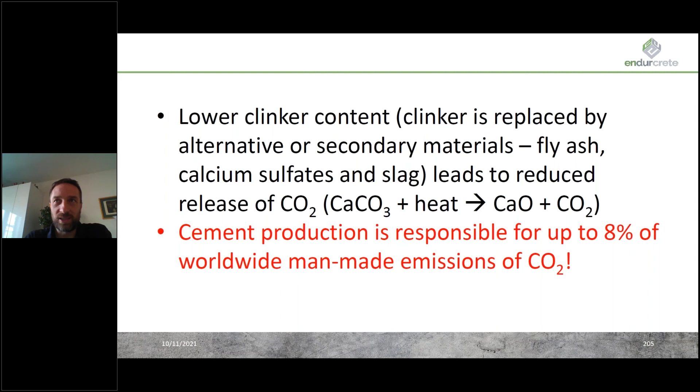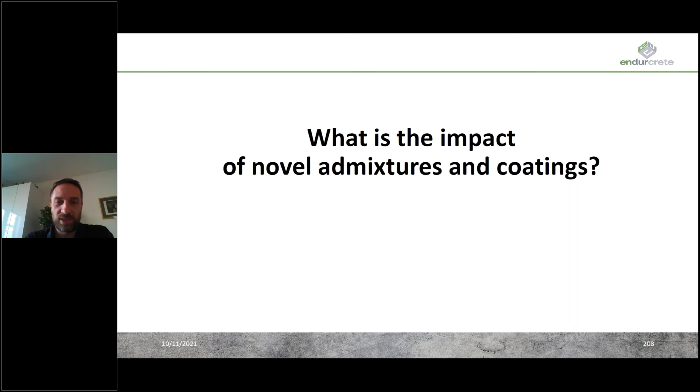Now to the alternative materials, novel admixtures and coatings. I will not present the detailed results here, but we can say that the environmental impacts of these new materials during the production phase only are slightly higher. However, if we consider the whole life cycle and the extended durability, their use certainly makes sense, because the extended durability leads to significant reduction of all environmental impacts and also costs. This will be summarized in the final deliverable of the project, due in December.

I can say this has been confirmed by our calculations, and also the recyclability of EnDurCrete concretes was analyzed, as already presented by Cecil. Recyclability analysis was also performed by Vito in terms of performance of the recycled materials, and similarly to the results of the partner ReSHEALience project, we can say that these new concretes can be fully recycled in the same way as standard concretes.